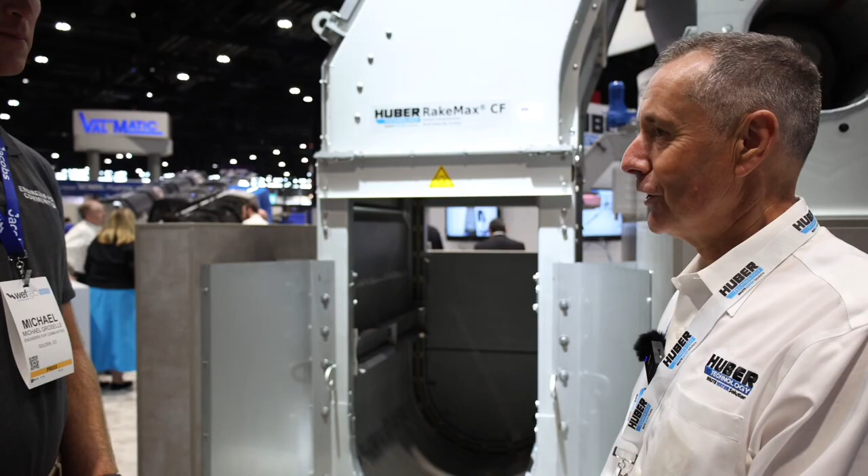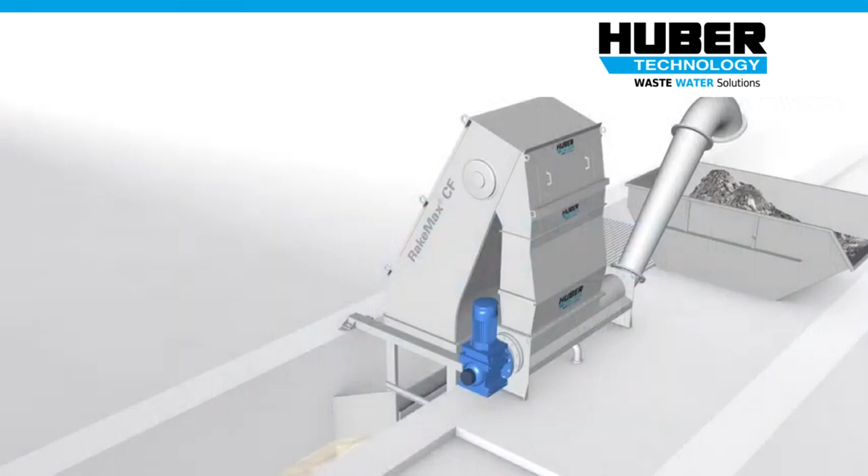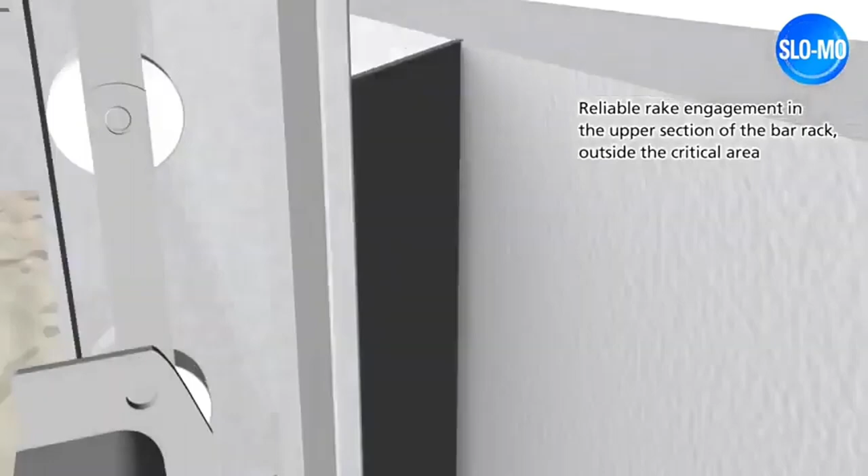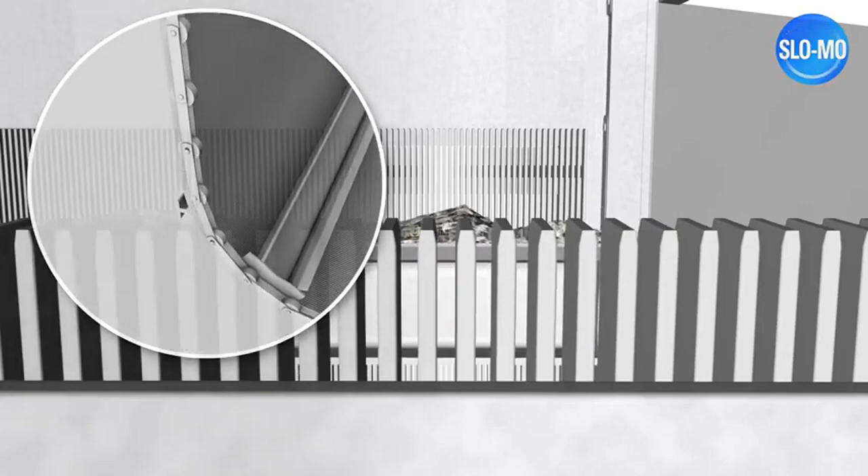This machine here washes the screenings to get rid of all the organic material, and then puts a dry, clean product in a dumpster so it's ready to go to landfill.

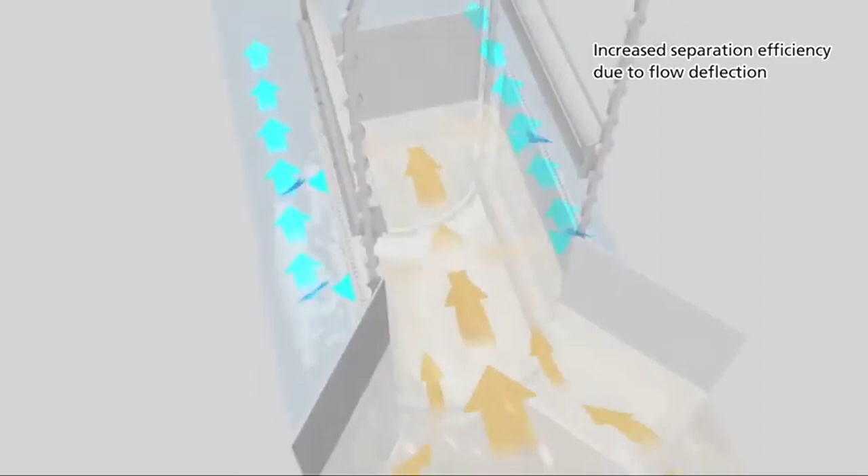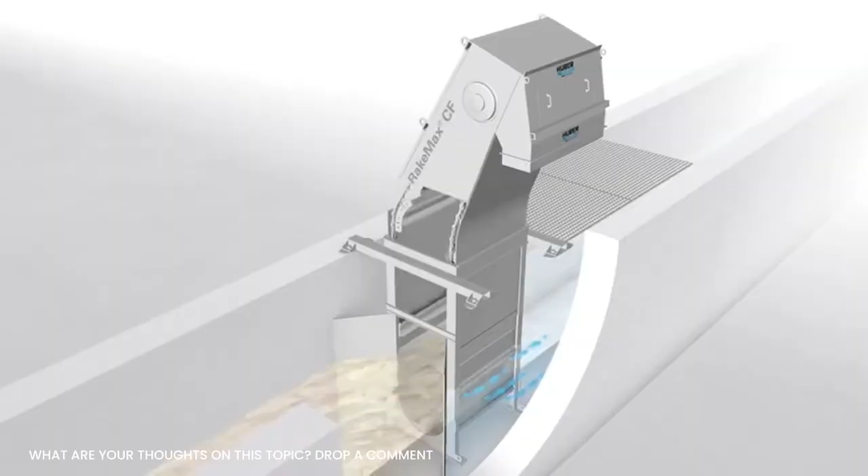What is it about the RakeMax that separates it from others? Well, definitely it can handle massive flows in a relatively small footprint. This is a small one, but this screen can be over 70 feet tall, so you can lift stuff up from a sewer that's way down the bottom and take everything up to ground level. And from a maintenance standpoint, there are very few moving parts. So this screen, even though parts move, you haven't got bearings - you've just got a simple scraping device on top, so you don't need any wash water. I would say that the simplicity and the robustness are what people like.

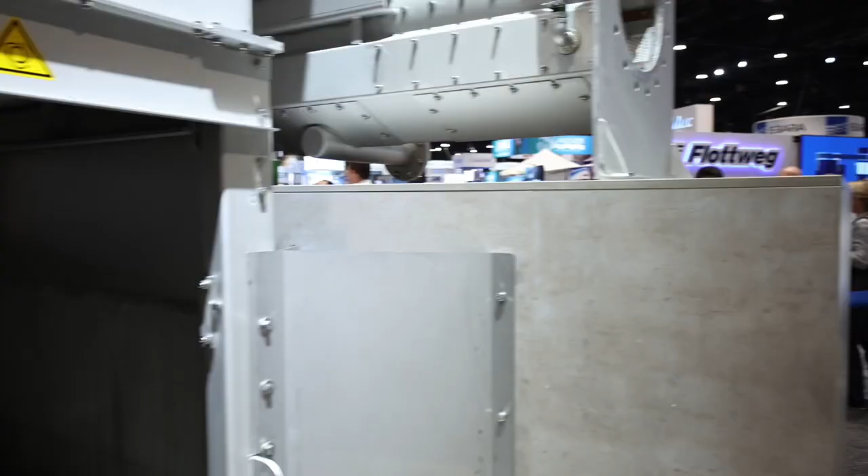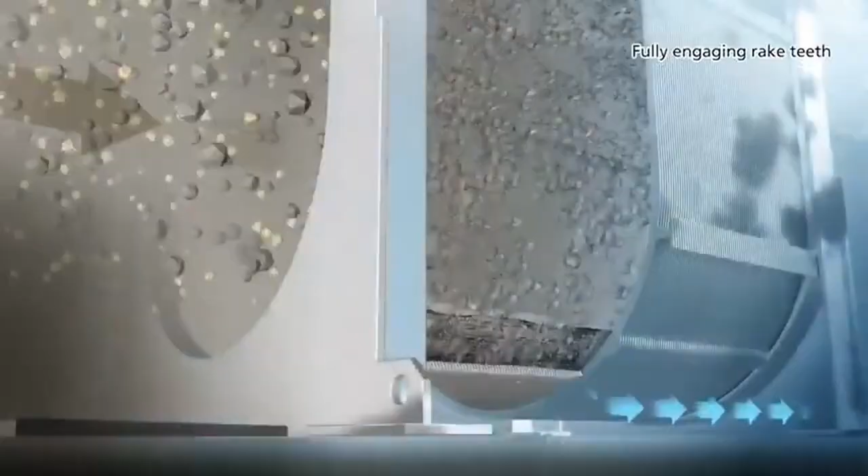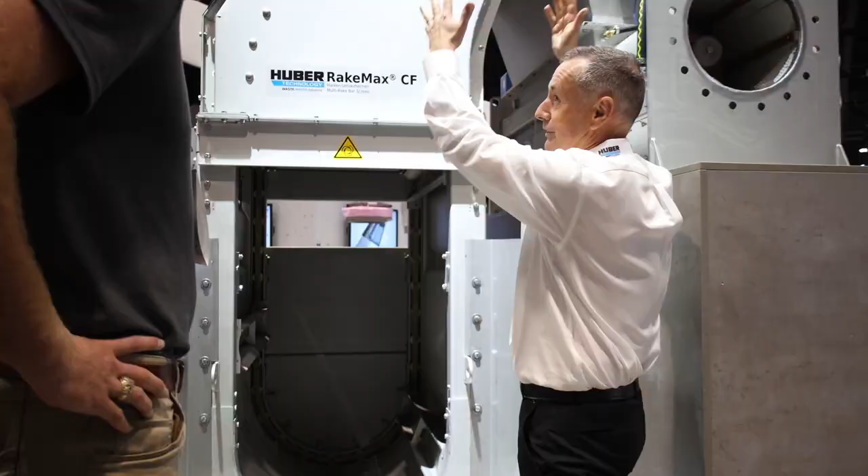So you said it could lift at 70 feet - does this essentially, if it went in a vault, or they go in vaults or manholes? Channels or chambers. This plastic bit at the side here is trying to show you what a concrete channel would look like, so that's what this is. The water level will be down here, but this part here that you see, that's just basically an elevator, so that can be another 50 or 60 feet. And then these rakes just drag the stuff as high as you need it, and that's the headspace at the top, and the material is pushed off the headspace.

All right, what is the grit trap? Well, the grit trap removes grit.

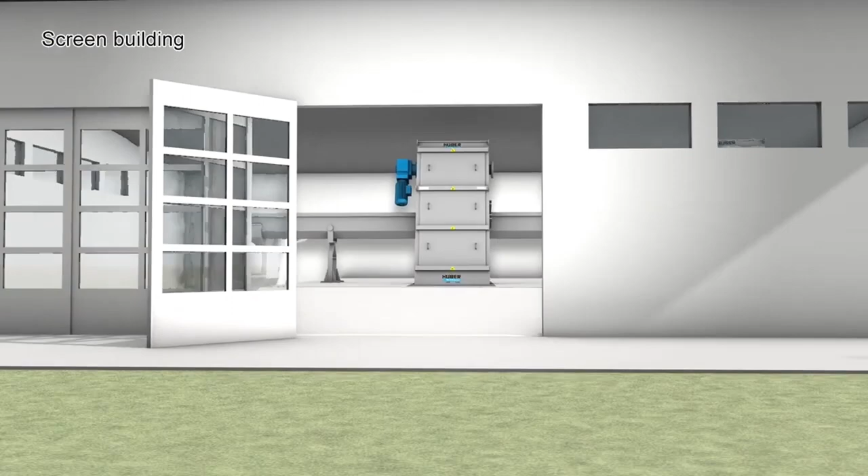People who don't understand wastewater probably don't understand that a lot of the grit, small stones, etc., get washed down from the roads and find their way into the sewer system, and that can cause havoc on the treatment process. Grit is like sandpaper. It wears pumps and valves, and it settles in chambers, changing how they work because they're filled with grit, reducing the volume.

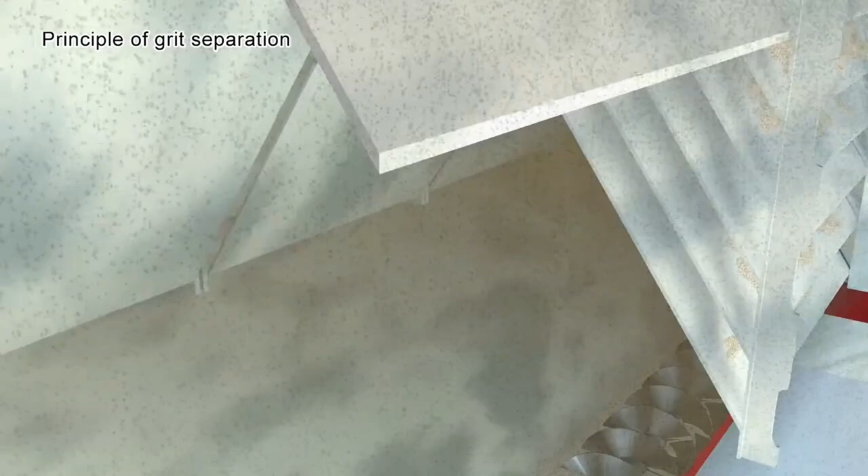So once you go through the first thing, which is a screen that takes out the plastics and paper, the big stuff, then this is a grit trap, which, as its name suggests, removes the grit, like fine sand. And yeah, it works like sandpaper, wears out the valves.

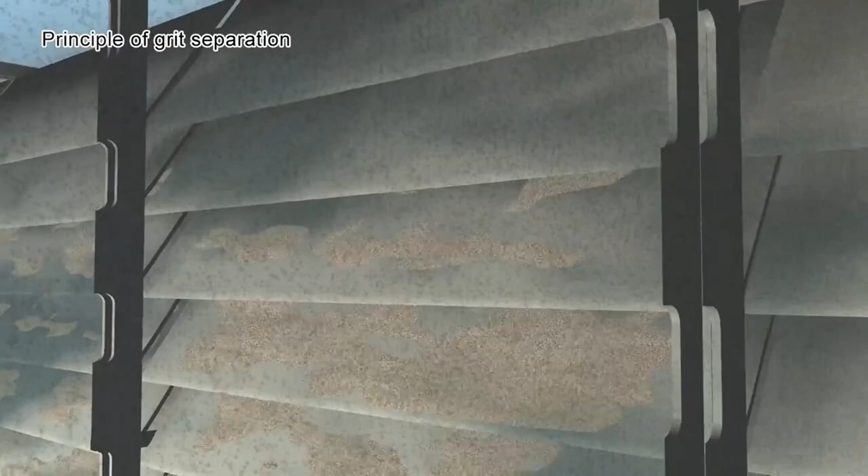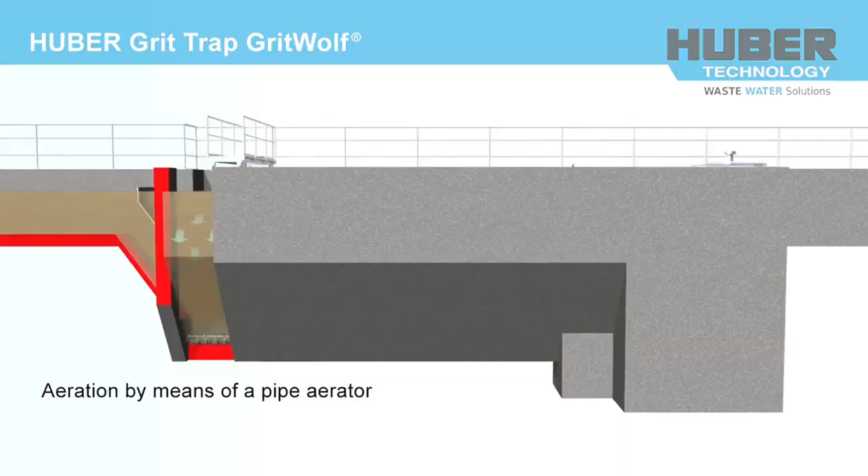This looks like a pretty big area. So where does the water go in? The flow is coming from this side and exiting out this side in the same channel. It comes directly from that previous piece of equipment, the screen, and enters this chamber, which is a concrete chamber. We have various sizes, but this might be 30 to 40 feet long typically, and perhaps 15 to 20 feet deep, so all the flow is flowing across this chamber.

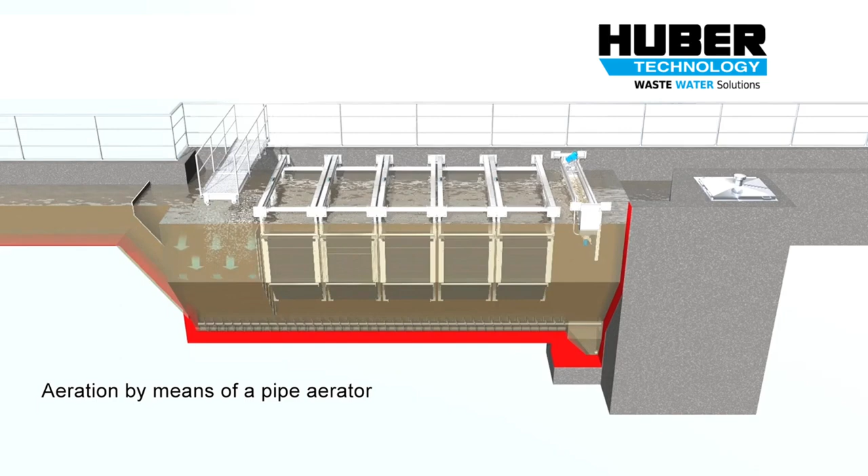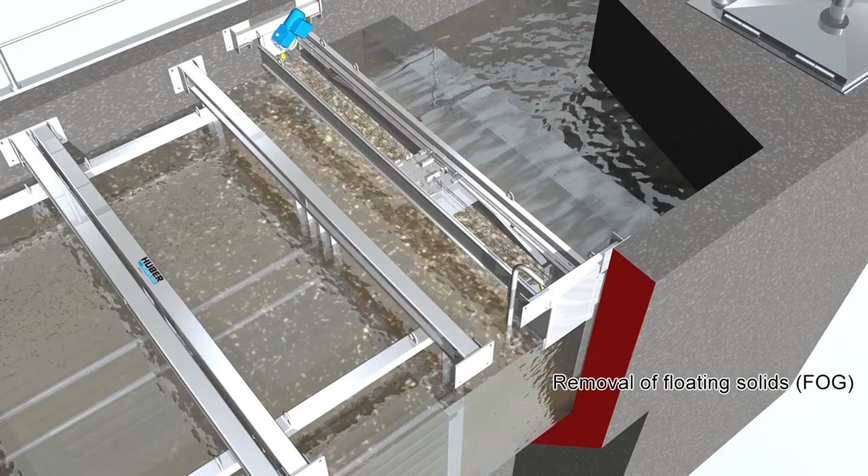Initially, we inject air into it. Air circulates and washes the grit. Why do we wash the grit? Because grease and fats will be on the grit, and to make it easier to sink and settle, we like to wash off the grease and fats.

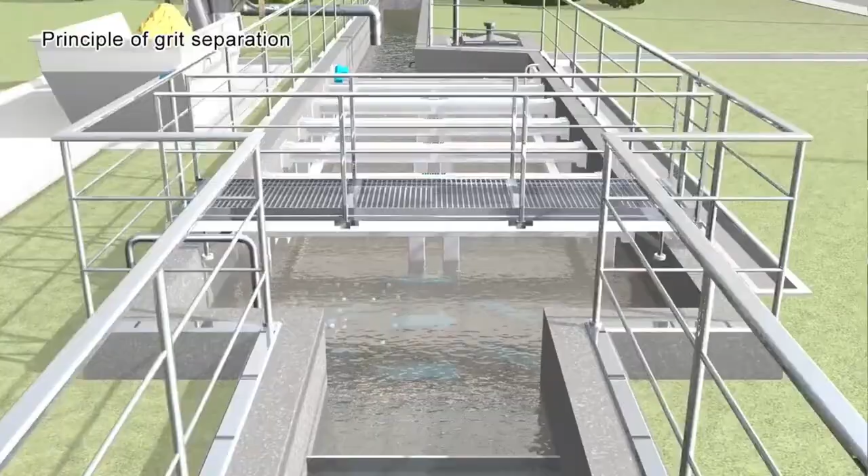Then what these are showing here are what we call lamella packages. I won't go too much into the science, but when you have a greater surface area, it's easier for the grit to adhere to the surface area and sink. So they're called lamella plates or lamella packages, and they enhance the grit settlement. Grit sinks to the bottom.

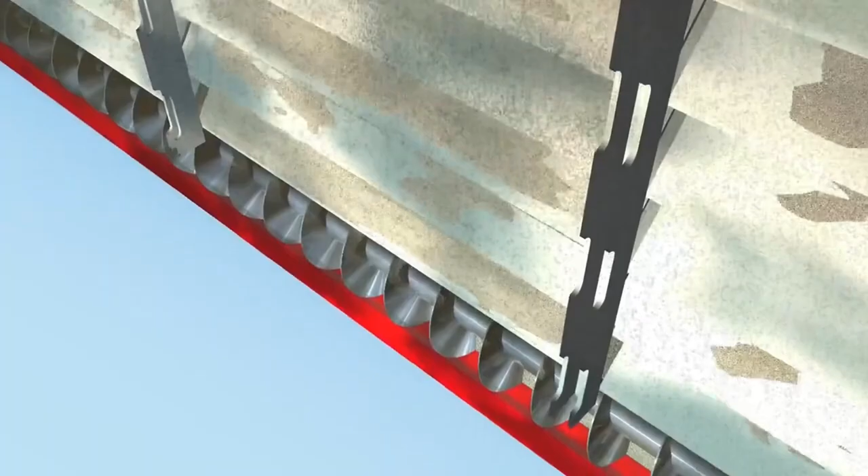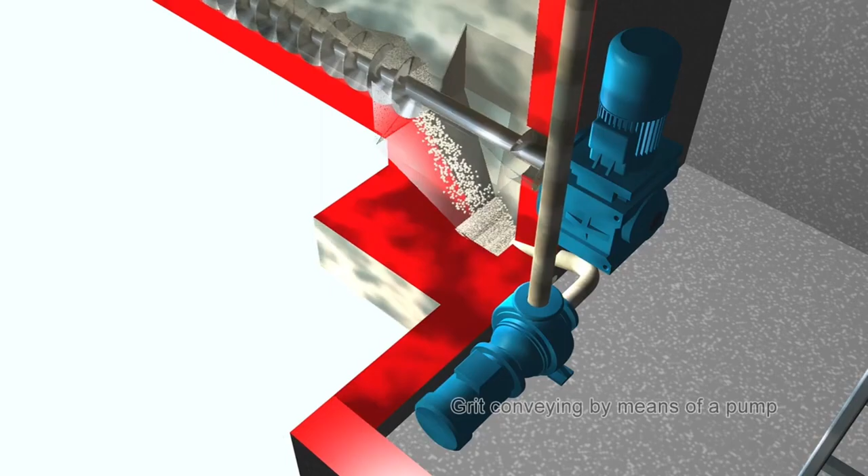And then if you look in the bottom, we're showing a shafted stainless steel screw, and that screw moves all that grit to the end. It drops into what we call a sump, and then a pump will pump that grit to a dewatering device, which is not shown here. But then you need to get rid of the water and put it into a dumpster.

So this grit wolf is what is called a high technology grit removal system, because it is settling out much, much finer grit than traditional grit systems. What do traditional grit systems aim for? About 300 microns. And this is aimed at 75 microns.

What's the kind of maintenance on one of these? Does it have a backwashing cycle, or is it pretty self-maintaining? Well, maintenance is always needed, but a clever design is to maintain those lamella packages — they just need to be periodically washed. We're designed so each one can be lifted up with a crane individually and washed with a pressure washer without turning the machine off.

That's the important part of it. You don't need a second train of these. You can just pull out, rinse, and it's still going. You pull them up, pressure wash them, lower them back in place, and you haven't stopped the stream of water going through it. Do a lot of other manufacturers' grit traps need a second train because they have to take the whole thing down to work on it? That's a huge deal.

That is a huge benefit of this system. Our main competitors, to maintain what they call the stack trays, the system has to be isolated and the whole thing needs to be taken apart.

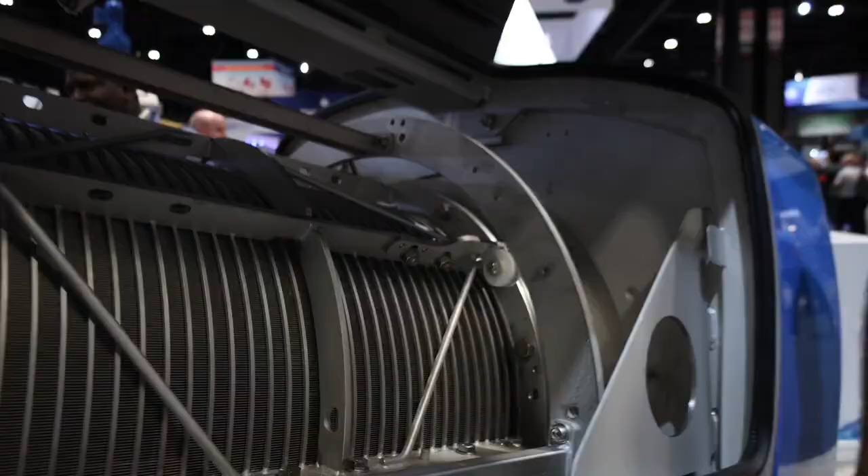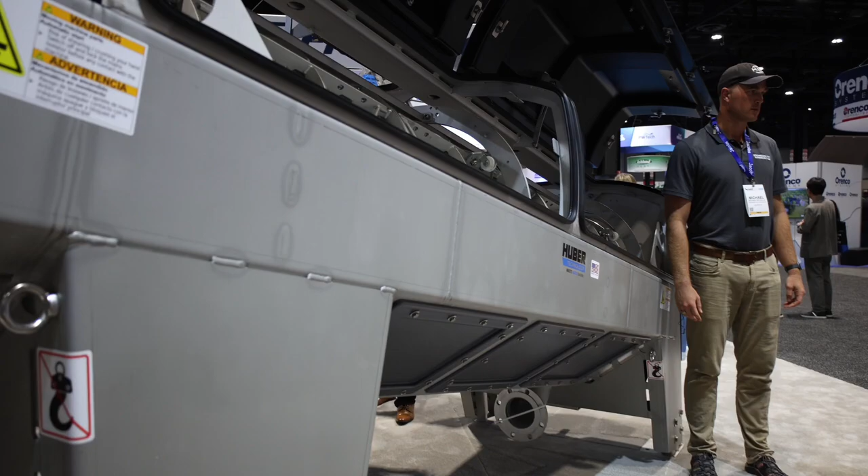So Huber's business is basically separation of solids from water. You saw what's called the headworks with screens and grit. We do not do wastewater treatment, we don't do the biology. This next section here is handling sludge. So the biology collects the sludge and pumps it away. That is a waste product, generally of no use.

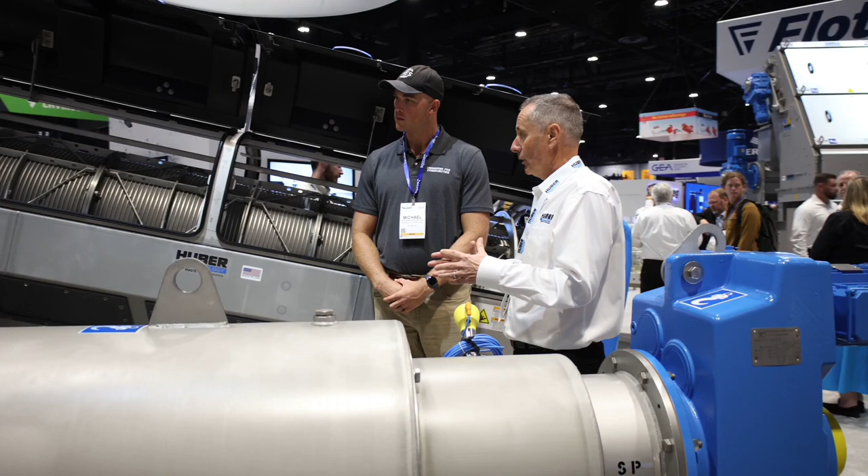So what the wastewater plants need to do is reduce the volume of that sludge so they're not paying to transport water off the sites. That's very expensive, and it's heavy too. They want to get rid of the water, make it as small as possible so they reduce transport costs, and provide it in a format that's acceptable for landfill sites to take.

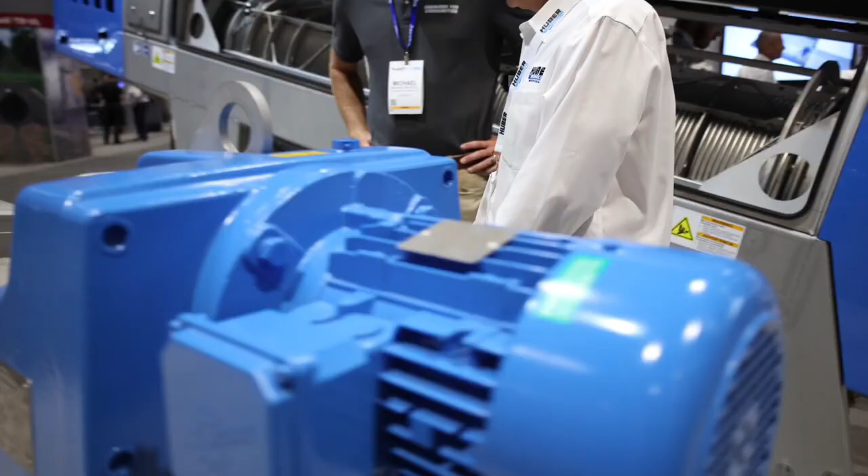This piece of equipment here on my left is called a strain press. So when the sludge is pumped from the clarifier, it can still have rags and plastic in it, so those need to be removed. This is what's called a strain press, because as its name suggests, it is straining the sludge, allowing the clean sludge to go to the next phase.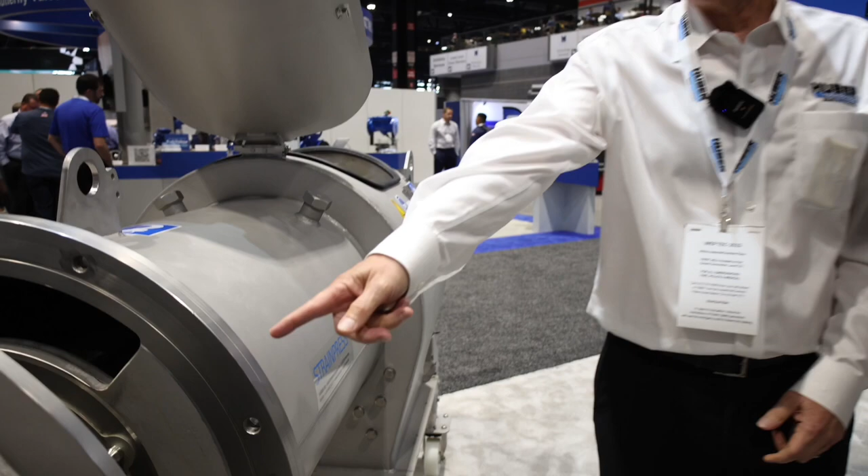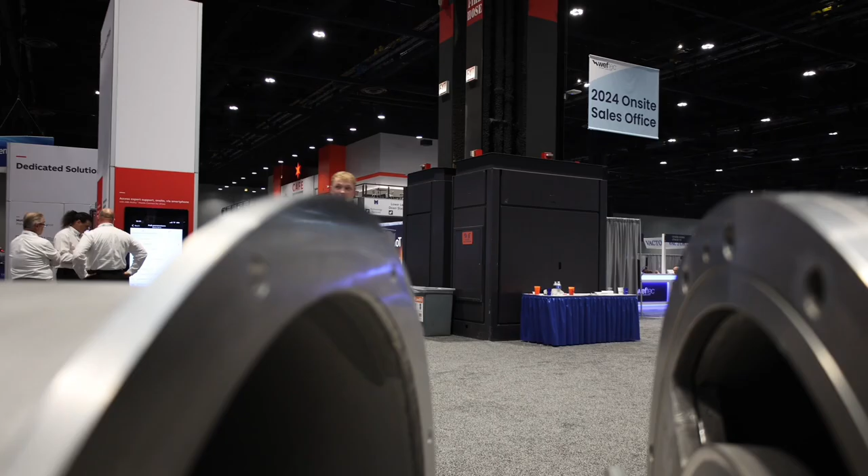And whatever residue, paper and plastics, which was left from the screening side of things, drops out here into a dumpster. If you look here, you'll see what the screen looks like. It's a very fine perforation to get out the hairs and the fibers and the non-biodegradable material which is left in the sludge.

This is after the clarifier, it's settled out, and it's getting essentially pumped into this Strainpress. It's getting essentially squeezed down the line. Does it dry it out too? So it doesn't dry it out.

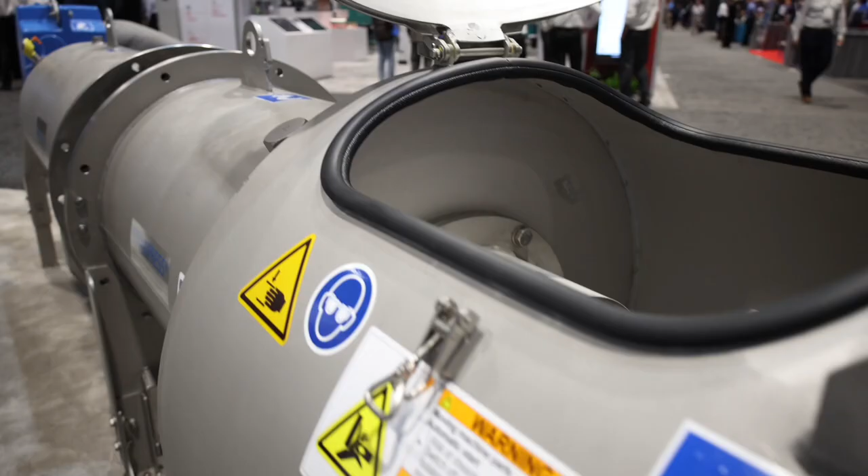So this comes out like just sludge cakes? No, this is where the fibers and plastics drop out into a dumpster. This is not dewatering the sludge. This is purely straining the sludge to get out the fibers and the small plastic elements that have escaped the initial screen at the headworks.

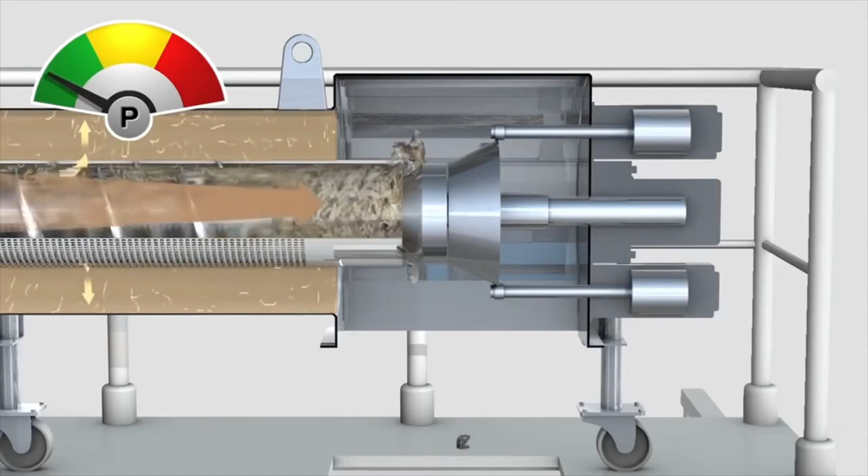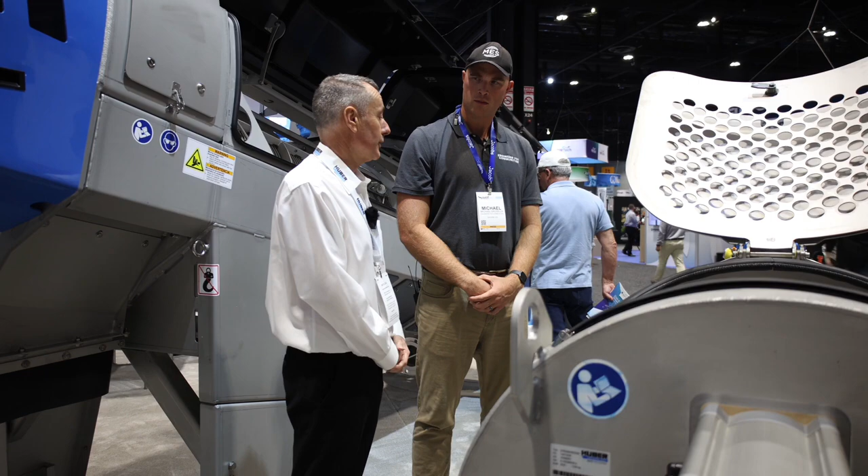So it's another form of screening. The main difference between the screen I showed you at the start and this screen is, number one, it's finer, but this is designed to take a pumped flow, so the flow is under pressure. The screen I showed you at the start is in an open channel, taking water flowing at perhaps 3, 4, 5 feet per second down an open channel. This is taking a pumped flow, which is under pressure, and this needs the pressure to work.

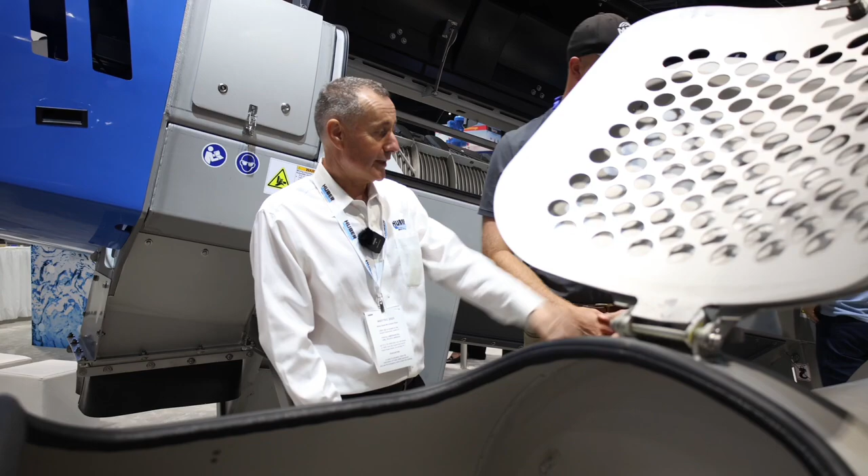So it enters from underneath through a pipe rather than a channel. This does not sit in a channel or a chamber. It sits on a floor, and you connect it up with probably a 4 or a 6-inch pipe.

When you're speccing out and your plant's going to have a Strainpress in it, what are some of the key points to consider? Well, we need to know the pumping rate because we have different sizes. So we need to know what it's being pumped at and what the density of that sludge is in terms of, is it 1%, 2%, 5% sludge? So we need to size the thing properly. That's the most important thing.

And then we often offer pilots for all of our equipment, free pilots that we allow the site to work it for a week or so. Because the other thing we need to work out is what size of openings do we need to have on the basket. A 5mm opening is standard, but sometimes if, for example, the sludge has all gone through a grinder, the particles could be smaller, so we need to go down to perhaps a 2mm or a 3mm basket.

It would be like if your system had a bunch of E-One systems in there, just grind. If you lived in just where the individual homeowners just ground it up and sent it in here, you're going to be looking at a different screen than a flat place that has no lift stations in it at all going to your plant. That's exactly right. That's the main determining factor, is how small the particles are that we need to remove.

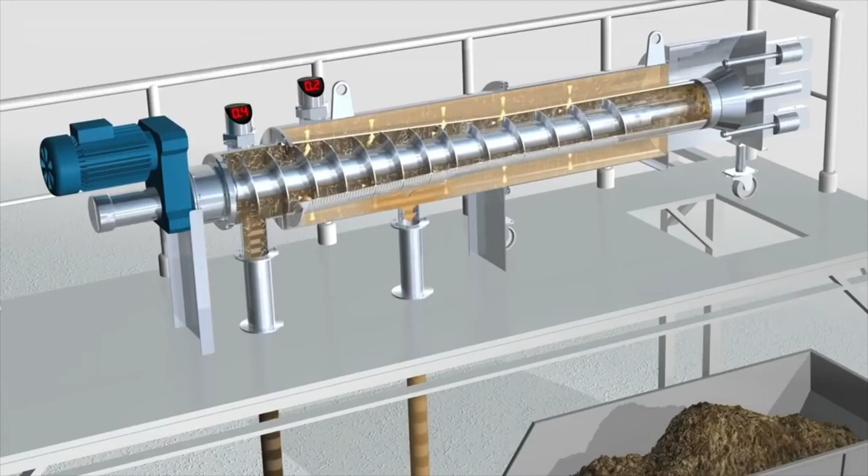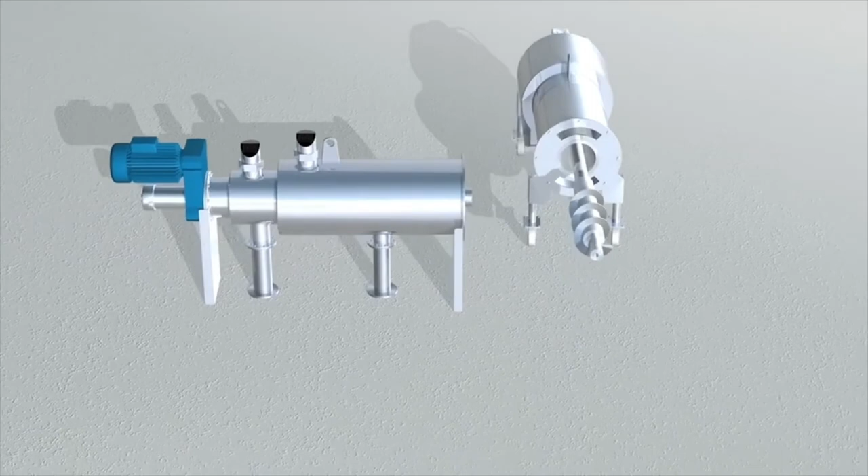So really, because there's no chemical addition, this is purely a screen. So just to reiterate, the sludge comes in and the sludge comes out in exactly the same format as it went in, apart from the fact that we've taken out hairs, fibers, and small bits of plastic and paper which have escaped the headworks, which can just go in the trash can and go to the landfill site. All right, so that's the Strainpress for screening sludge.

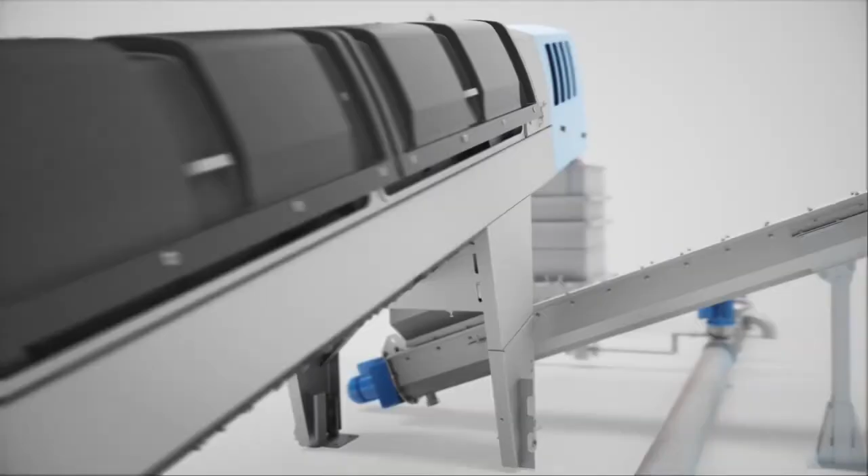And then on the other side here, this is a more sophisticated piece of equipment. This is a screw press. Now, this is the machine that would take the sludge that will be very, very liquid, maybe 1, 2, probably no more than 4 or 5%. And it will go into this machine, and its job is to dewater the sludge to a point that this is what drops out, the cake of sludge.

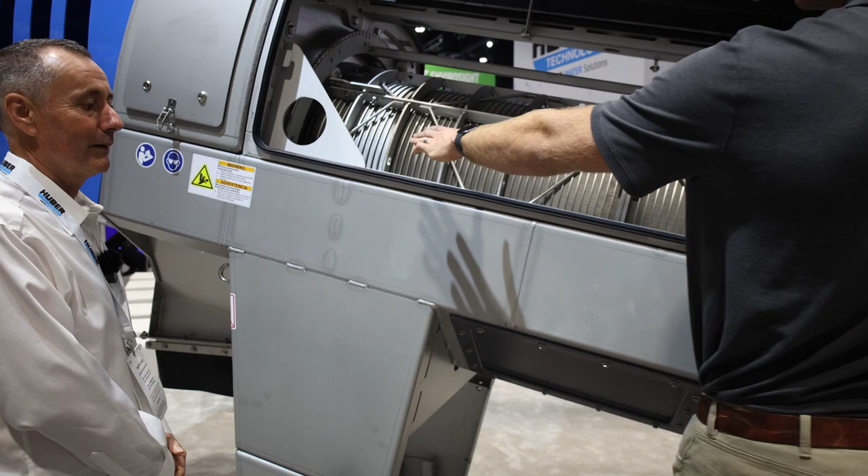So this whole thing gets filled. Yep, and it ends up being this small when it comes out. Something like that, yes, pretty much. So there's the inlet.

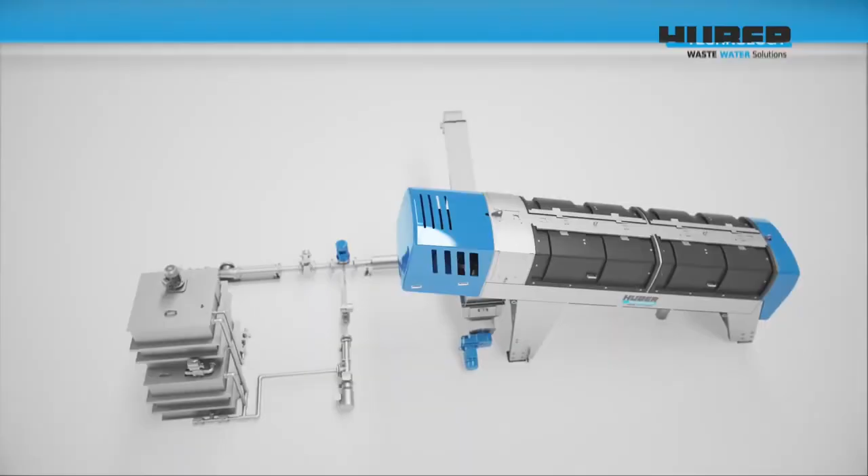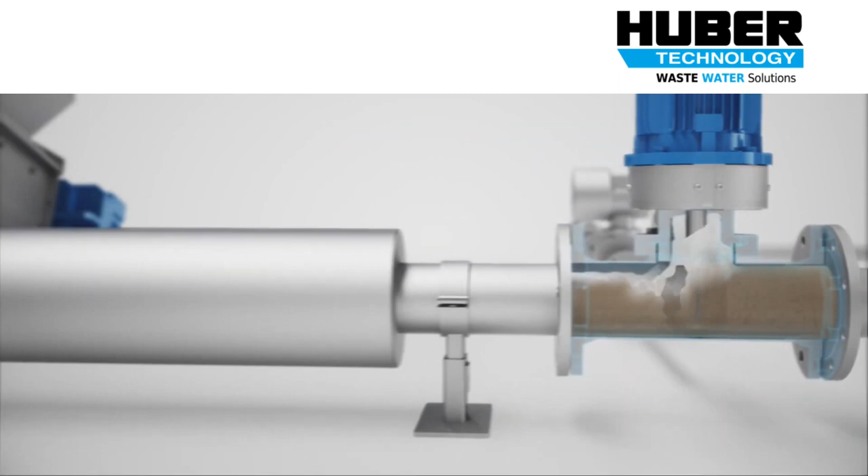Now, what will happen before that is, and again, I'm no expert in this area, but we will add a polymer. A polymer creates flocculation, and that makes the sludge easier to dewater. So virtually every time we sell this machine, either us or a separate vendor is supplying a polymer pump to inject the polymer into the sludge.

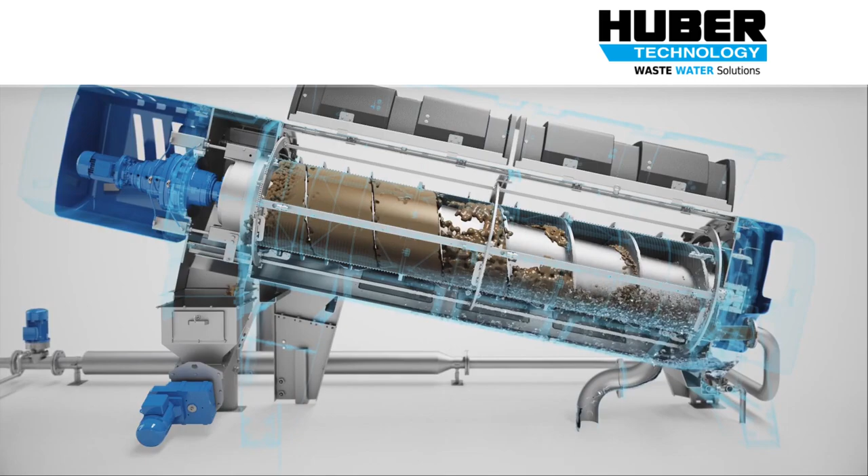Before it, like as it's coming in? Yeah, just somewhere here, right, okay. You know, and then give it time to work. And then it goes into the Q press, as we call it, which is a screw press. And then the sludge flocculates, and that makes it easier to remove the water, and you get better performance of your sludge coming out the end.

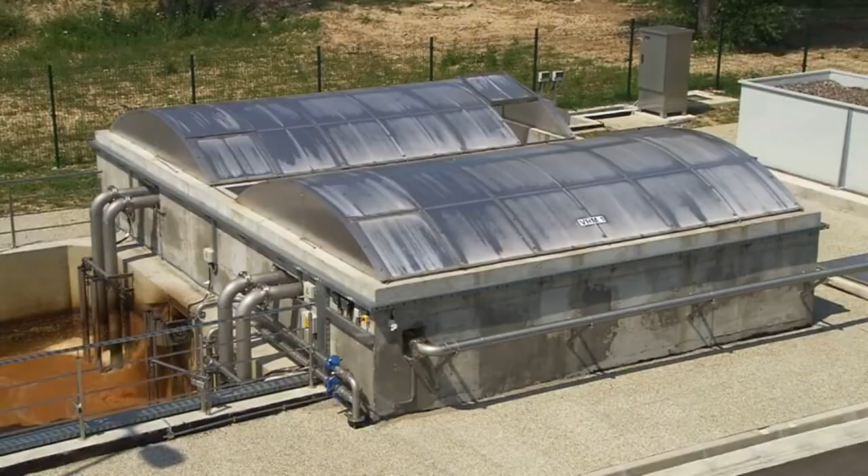So when an engineer or a municipality is looking at speccing one of these screw presses out, what are some of the key points that they should be looking at and selecting it? Well, that is a bit more complicated because nearly every time we sell one of these, we have to do a site pilot. So it's very specific.

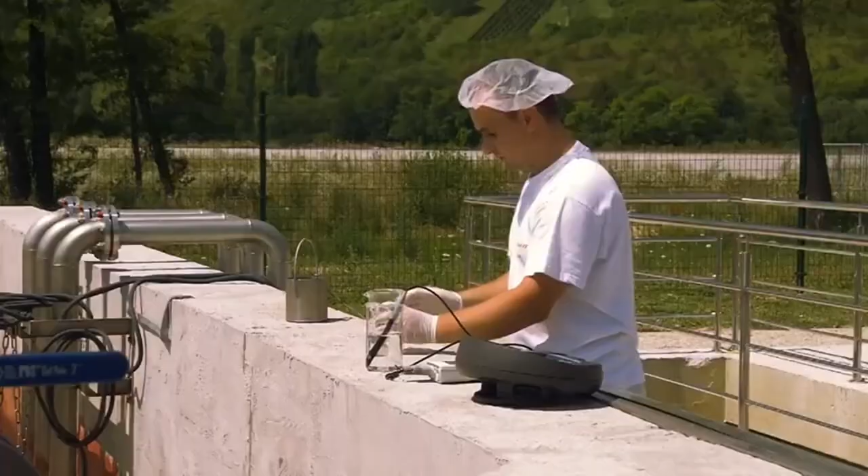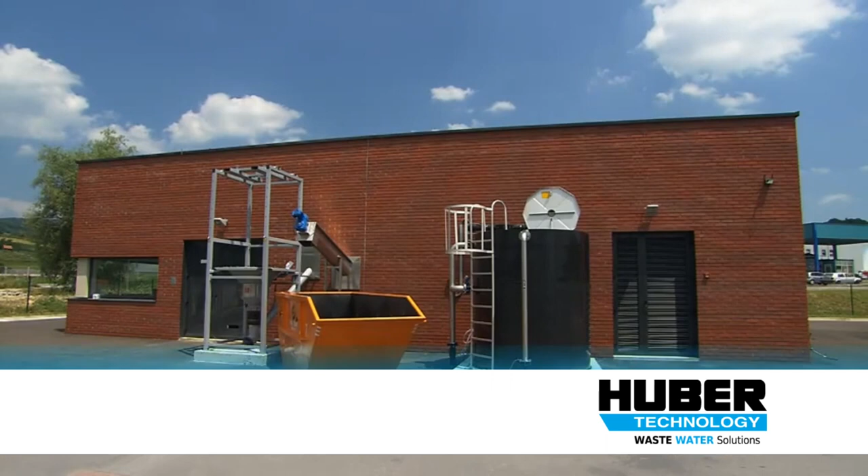And we do what's called a bench test. So we have a lab technician, and she has all the polymers, and she works her magic that I know very little about, like a sort of a science experiment. And then we will send back the customer a report telling them what we think we can do for them in terms of dewaterability and how much polymer we would need to achieve that.

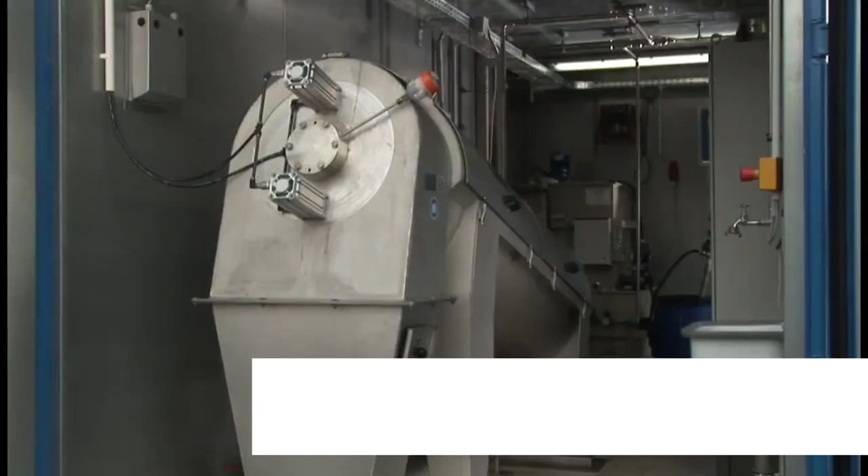Now, they might come back to us and say, well, that's not acceptable. And we say, well, thank you very much. But if they say, yep, you're in the ballpark of what we want to achieve, then we'll offer to send a slightly smaller one than this to site in a container. And we send a technician, and he will run it for them for a week.

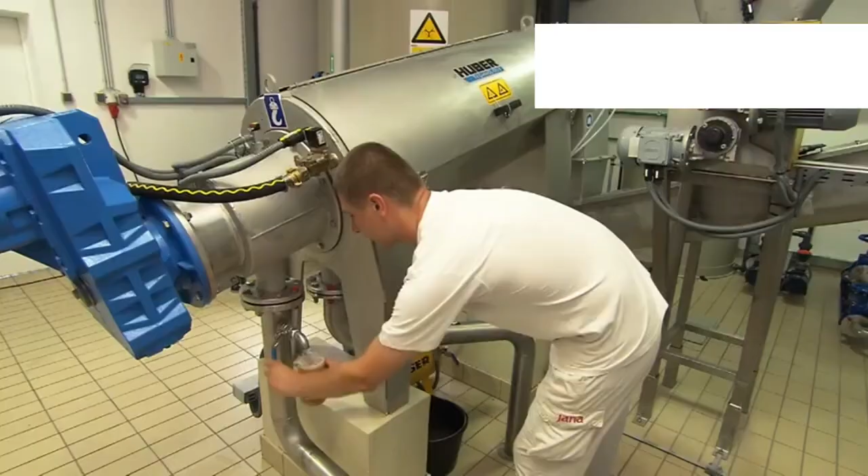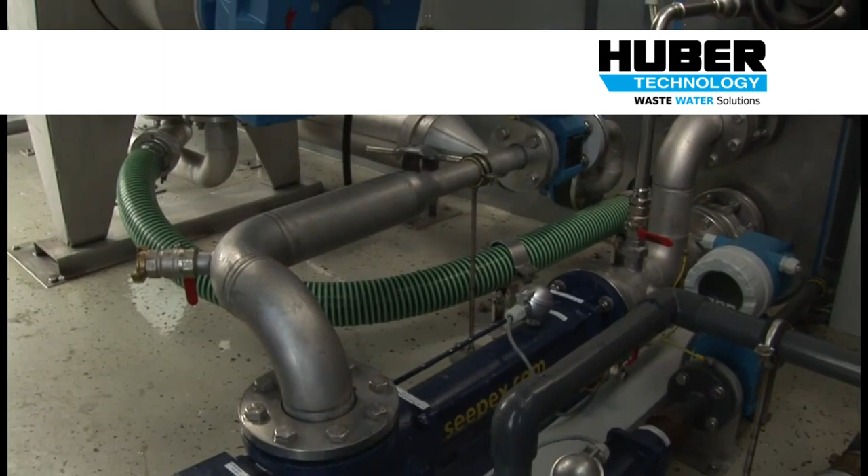And we try different polymers, and we measure what comes out the end. And then we produce a final report for them, which then will develop the specification and the performance guarantees. So in this industry, we have to live with penalties. So we don't want to tell anyone that we can do something unless we're pretty darn sure we can do it.

So we might come to them and say, based on your flow, we can produce 20% dry solids using this much polymer in a year. And then they will make the decision if that's acceptable. And if it is, we will then bid the job and hopefully win it. So we need to know throughput, and we need to know what they're looking to produce coming out of the end. That's the bottom line.

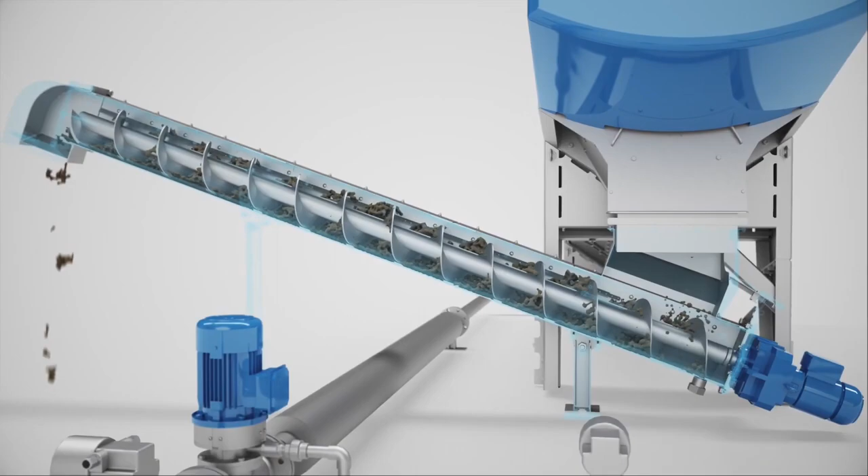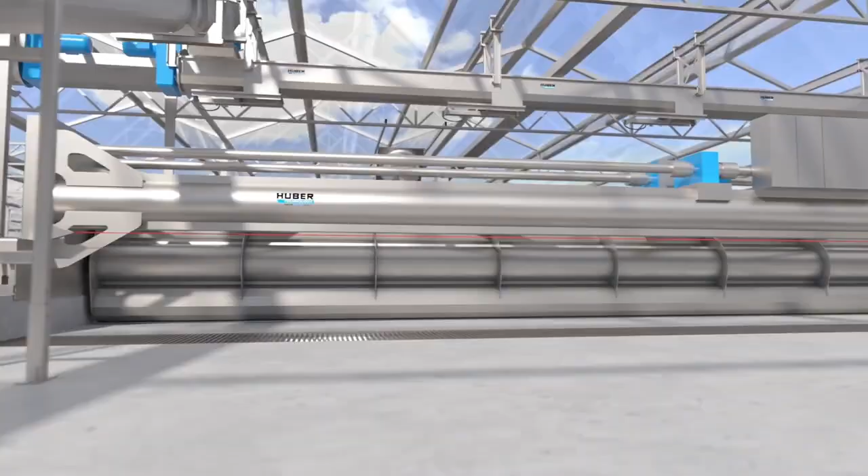Often that is acceptable to take to landfill. Okay, it's pretty dry. I mean, you can squeeze water out of it. So often that's enough. But then what a lot of sites are now doing are weighing up the cost of, do we want to dry to, let's say, 90% dry solids? So that will reduce it down almost to a powder.

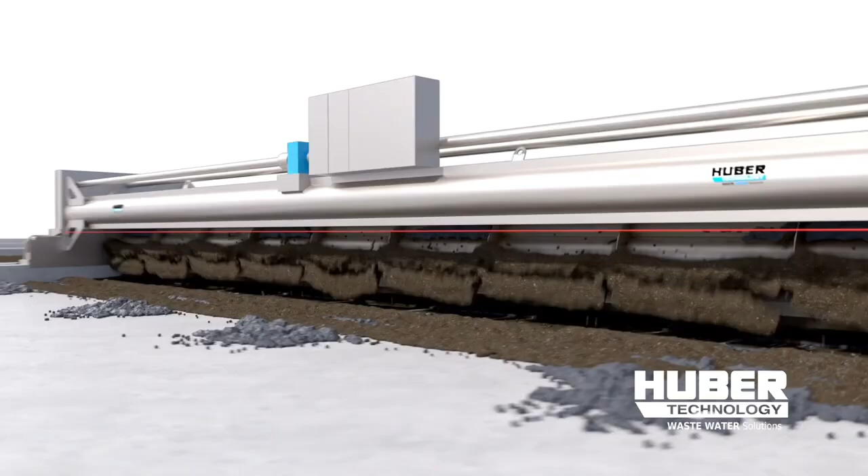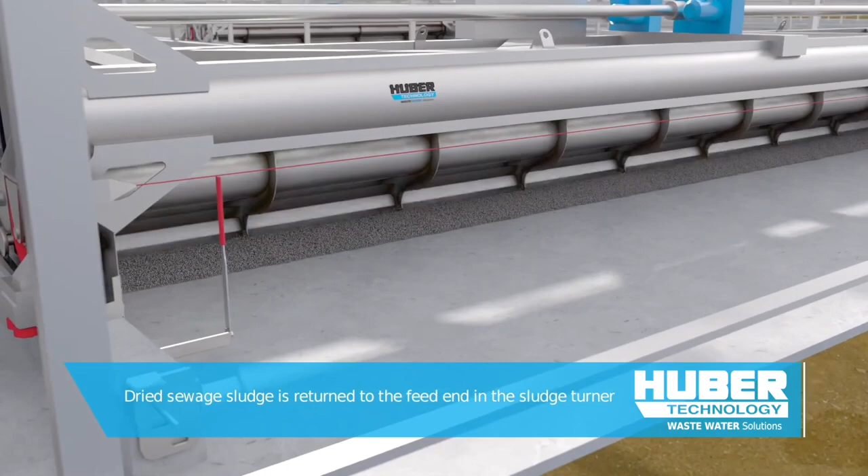And I can show you some examples when we move over there. And is it worth us doing that? Because you're now looking at pieces of equipment that can be $4, $5, $6, $7, $8 million. I give you that range because it depends on the size of plant, but you're not looking at a small change here. You're looking at big investments.

So is this targeting like a pretty, I mean, you have to have pretty high amount of waste in your system? It's not necessarily that, because some of them are doing regional plants where 4 or 5 small plants get together and do it in one space. But it's more about what is the landfill rules? What will landfill accept? Every state's different. How far do we need to transport it?

If a wastewater plant can go to a landfill in 3 miles, then you might as well just keep dewatering it. But if the landfill site is 100 miles away, then they might want to save more money on transport costs. That makes sense. And some states won't accept it, so they have to transport this to another state. Is it because it's industrial waste? No, just whatever the landfill regulations are and the permits. Like if it's in California, you might have to ship it to Nevada.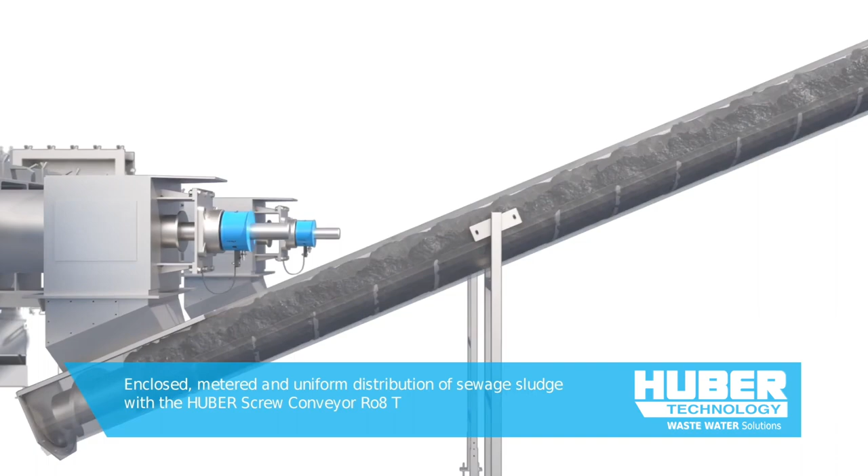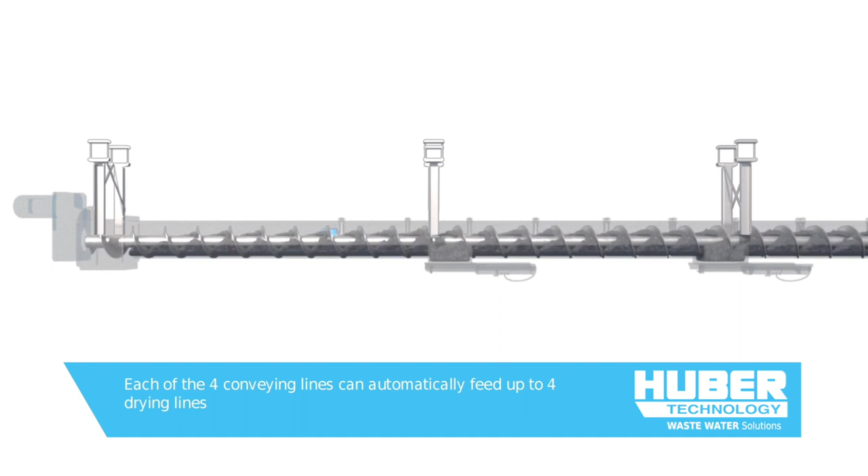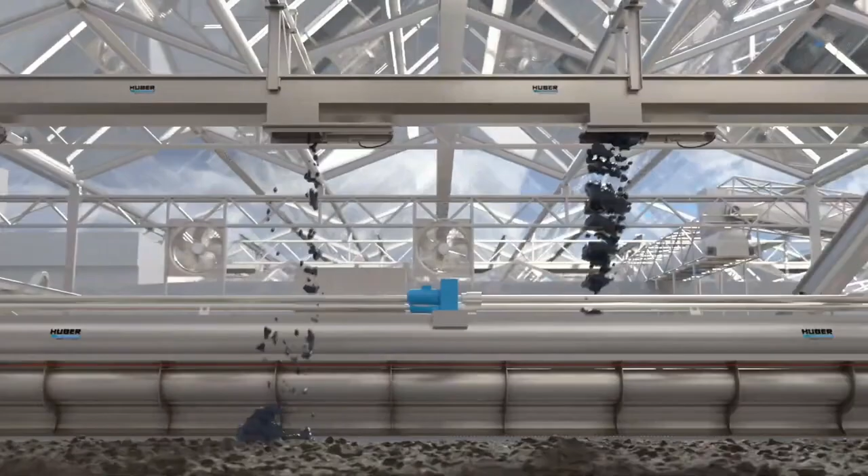Something like that, yes. So somebody, their consulting engineer and the plant are making a decision whether this is a viable thing to do. So if they decide it is, we could then talk about 2 options. This is my personal favorite. This is a solar dryer. So obviously in this world, we're trying to reduce our fossil fuel usage. And this is the way that sunny climates can do it.

Arizona, California, Florida, mainly the Carolinas, Georgia. We're just installing one in... Without rain? It's the solar energy.

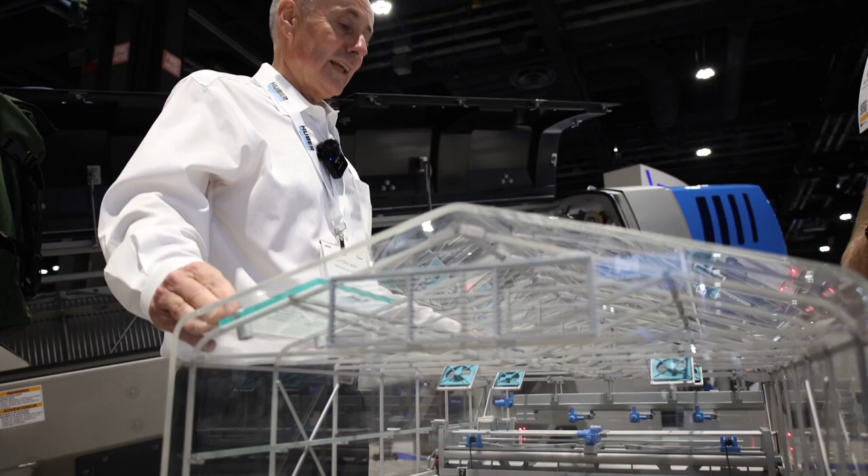So what you've got here is a 400-foot long greenhouse by about 40 feet wide. And the sludge from this dewatering device will be conveyed into here.

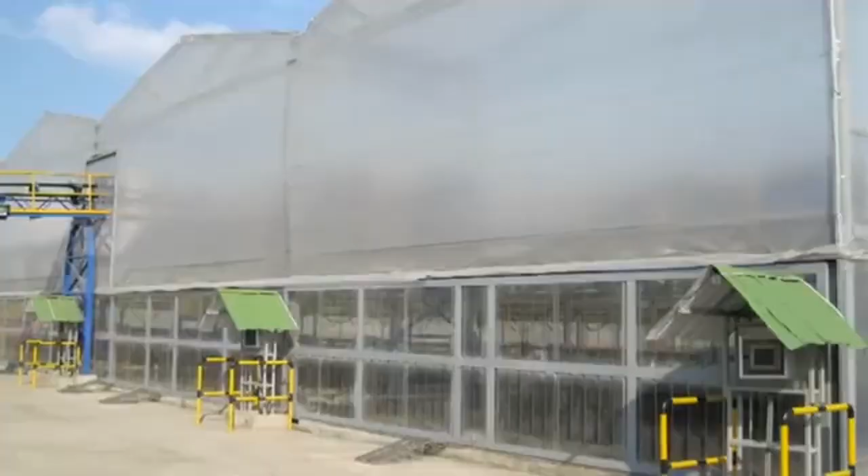What we've got in the middle here is a conveyor, number one. It drops it down there. And then this plow is called a turning device, and it goes up and down on rails.

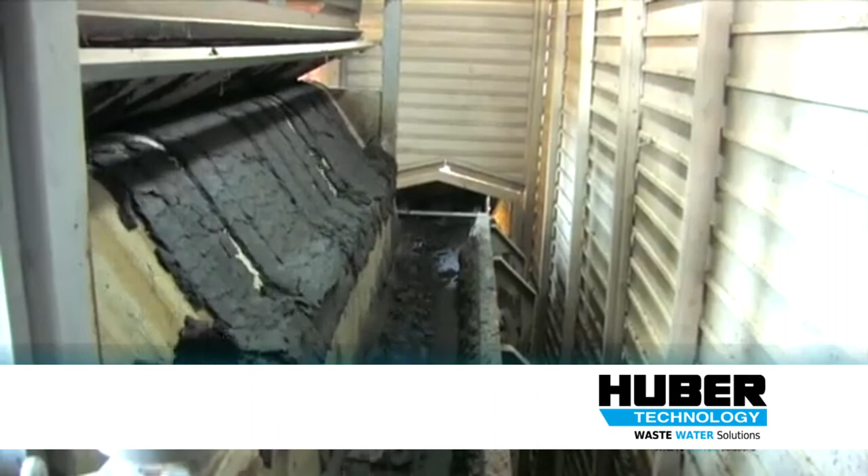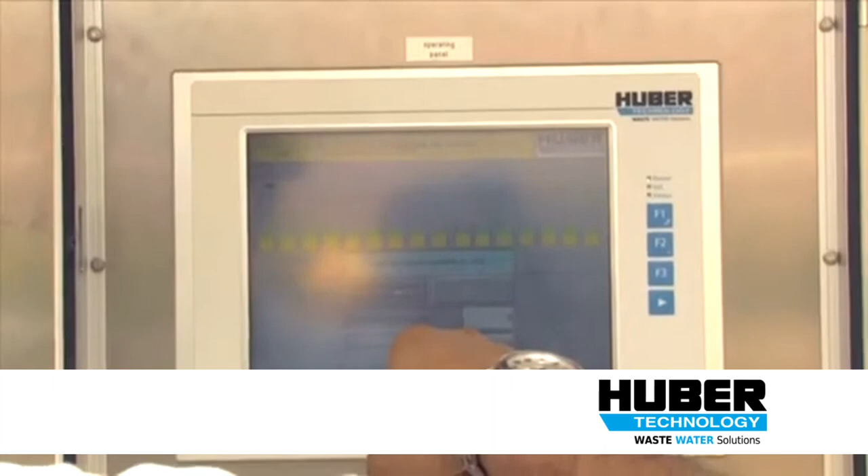It is churning that sludge, turning it like a plow, going through it, turning it and flipping it over so that you get unified drying. Then after a period of time, that plow picks it up, takes it back to one of either end, drops it into another conveyor, and that conveyor drops it into a dumpster.

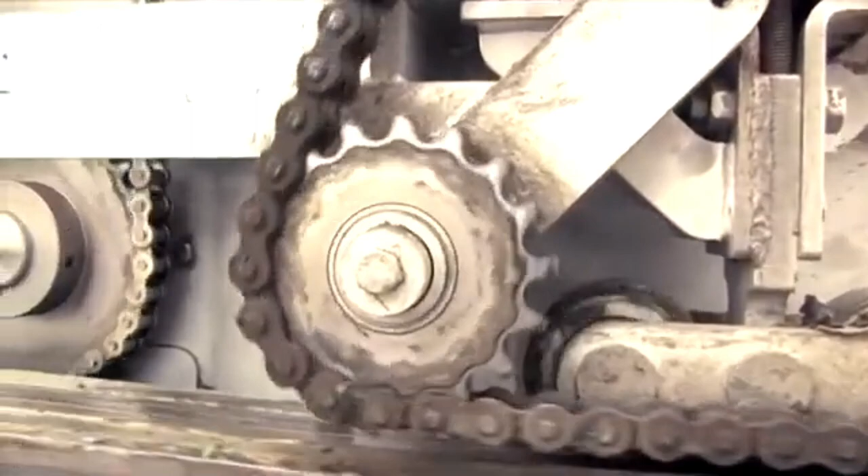So it really is that simple. And you said it can get rid of 90% of the water that was left in it? It can do that, yes. And what is that in terms of weight?

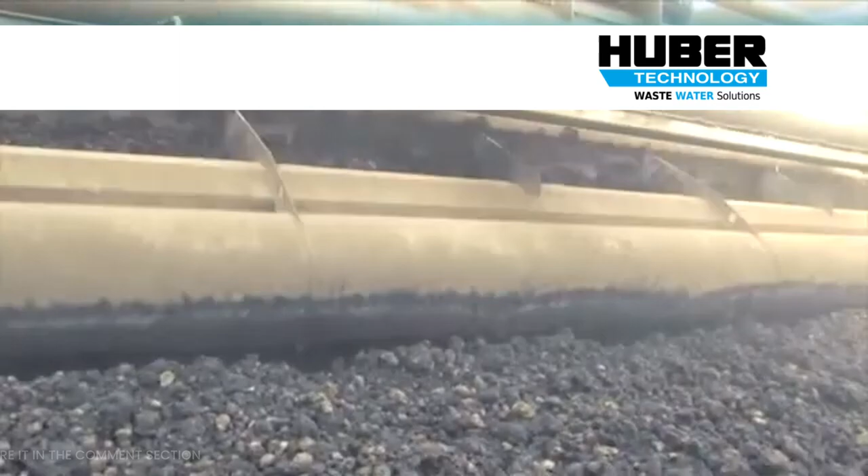I don't know about weight, but if you've got your camera here, that's it. That is from one of our dryers in Arizona. Sometimes they pelletize it.

Is it used as fertilizer at all? Is there a next step in it? That is a really, really, really good question.

So that's solar drying. This is the one that really dries it, and I'll get to that question about fertilizer. This is a belt thermal dryer. So you're looking at a really complicated piece of equipment here, but you're looking at a massive hairdryer.

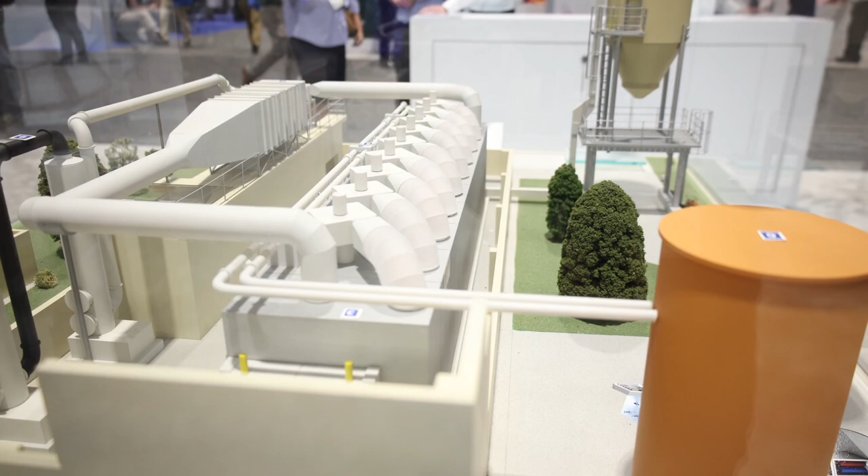So within that box there, you have got a conveyor belt, which moves to the end, drops it down onto another conveyor belt, and moves it back again when it drops into a conveyor and can be removed. What you're seeing on top is hot air supplies.

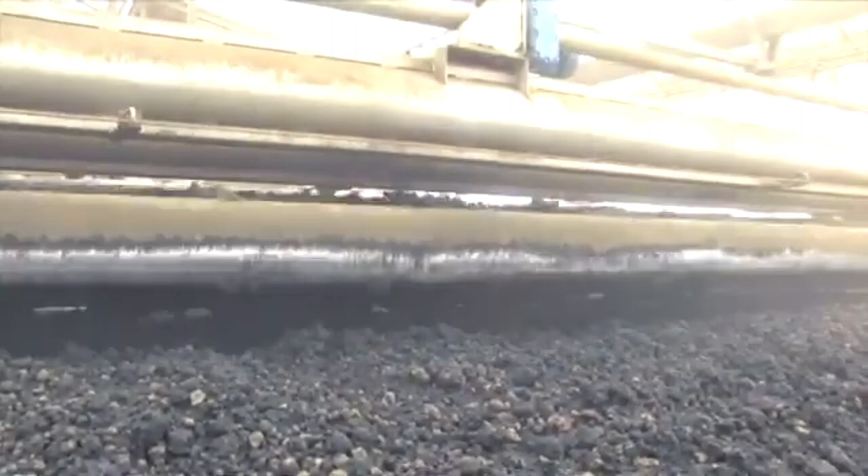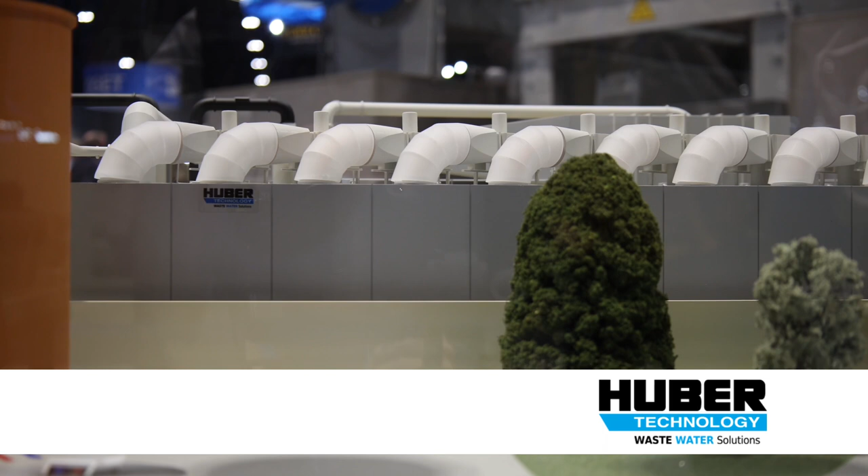We are rotating air through a set of heat exchangers, makes it very hot. It's passing through the belt, and as the belt is trundling along very slowly, at each of those sections, it's being hit by hot air, just drying it out.

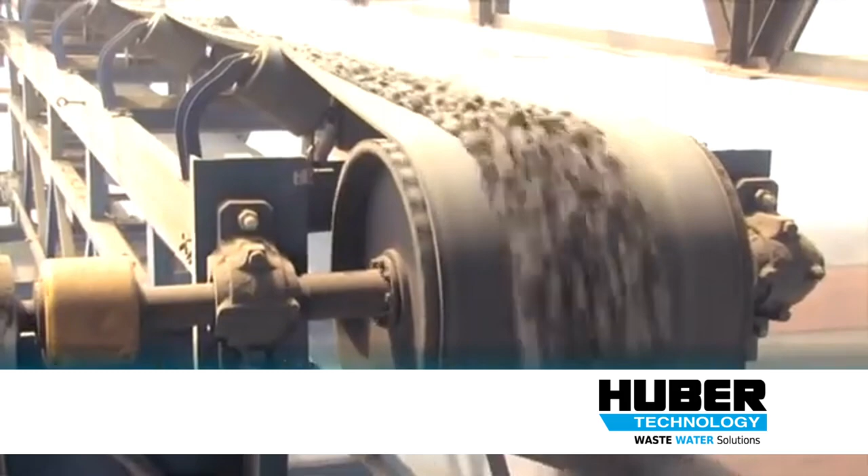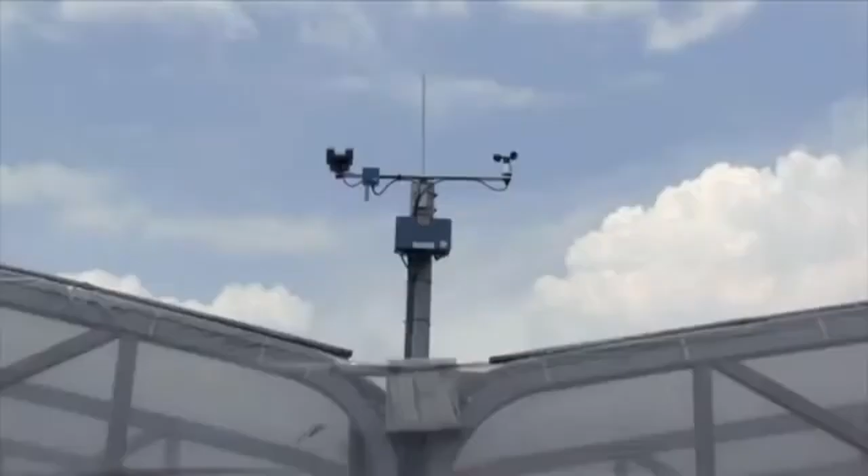This will guarantee 90% dry solids. We can provide a guarantee on that, and that's what really produces the very driest sludge. It's pretty, doesn't feel, it's not that heavy. No, and there's a lot going on around there in terms of pumps and storage hoppers and condensers. But the core thing that we manufacture is that belt thermal dryer, which is the belt and the hot circulating air.

Now this is the product where we can guarantee producing a product that the municipalities can either sell or give away as a fertilizer to farmers, sod growers, and the general public.

So it's kind of a two cost thing, and you switched it from being an ongoing cost that they have to pay to have it hauled, and you've now flipped it around, and now they're essentially selling the stuff that comes into their system. More often than not, they give it away because they have zero transport costs.

So we have a large installation close to us, near our factory, a place called Mooresville in North Carolina. I think we installed it in 2013. They've got to the point now where they do not have any freight costs. They give away every single ounce of dried sludge.

People are begging them for it. People turn up with their pickup trucks, and they have contracts with farmers that come with big trucks and take it away by the truckload. But they have zero freight costs.

That's probably saving them maybe $300,000 a year. And that's why you were talking about the multi-million-dollar project, because they're going to save it in 10 years. What is the return on investment? Let's say for argument's sake one of these is $6 or $7 million. Someone smarter than me is working out what the return on investment is.